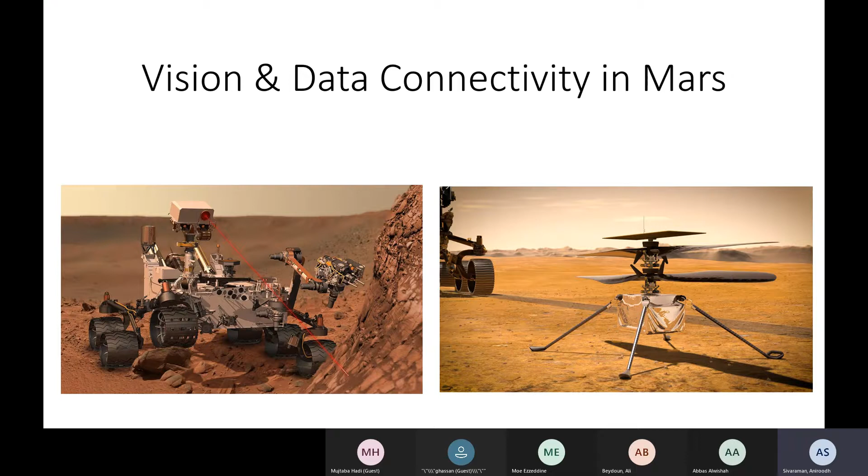So this is the data connectivity solutions for robotics and vision systems. I'll go over a few things, like the Perseverance mission on Mars. You can see the rover or the helicopter, everything has a vision system. And if you have a vision system, you need telemetry, somewhere you need to record the data and process it, so that's the brain and eyes of it. It's not just Perseverance, it's the extreme conditions and applications.

For example, we have firefighting drones. For agriculture, they'd be spraying fertilizers, very toxic chemicals like phosphorus that could affect your design and material selection, and in mining, constant dust pollution and everything. This is the thermal imaging system. This is where you need data connectivity, like 1 gigabit or 100 MB, depending on your application and environment, just to give you a feel of where we are heading.

A few more challenging environments would be underwater drones, firefighting robots at very high temperatures, and ROV, remotely operated vehicles. They're sent for oil and gas, to switch a valve on or off, installation purposes. We also do the data connectivity and mechanical hardware for that. If you go underwater, you need metallic casings to withstand very high hydrostatic pressure, so things start changing. The deeper in the water you go, the more bulky it gets. Whereas in the previous case, these are lightweight, but material selection and design are very important.

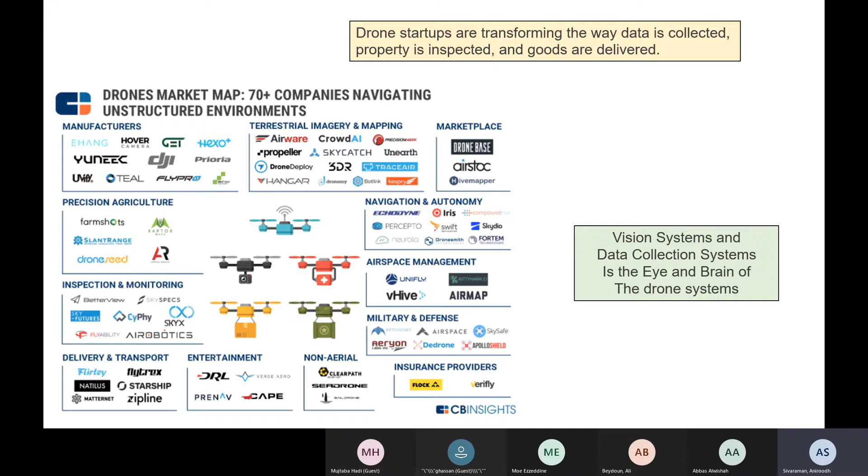So these are a bunch of startups I saw in Google Images for different fields - navigation, military, insurance, entertainment, delivery like FedEx. You can use drones and vision systems for everything, and for everything you need a vision system, which means you need data connectivity. So that's it, we'll start jumping into the mechanical design of this.

So what are we designing for? If any of you are starting to design, you need to ask who it's for, or which application and environment it's going to be in. So let's design for your environment and application.

Let's say we have ambient conditions. You start looking at factors like: what is the temperature range? What is the shock? Is there going to be vibration? What is the flammability? All these factors come into the picture.

So what's your application? That's the question. Someone says, hey, I'm going to put the camera on a vehicle. Is it on road or off road? If it's on road, it could be minus 40 to 125 degrees. That means it could be in Arizona, or it can also be in Michigan when it gets to minus 40 sometimes.

And what is the shock when you hit a road and a pit? If you go into a pit very often in Michigan, you're going to have shock. The camera still has to function, it should not disintegrate. And what is the vibration?

So we put accelerometers - if you want to know your random vibration, it's very simple. Just put an accelerometer in your car, at whichever location you want, say your dash cam or something, and record it. You'll get a graph and that's the random vibration. 10 or 20 GRMS is like a root mean square, the average G force it's going to have, let's say 10 G. So you've got to design for that, and if there's a resonant frequency, the camera would come off or the vision system would come off.

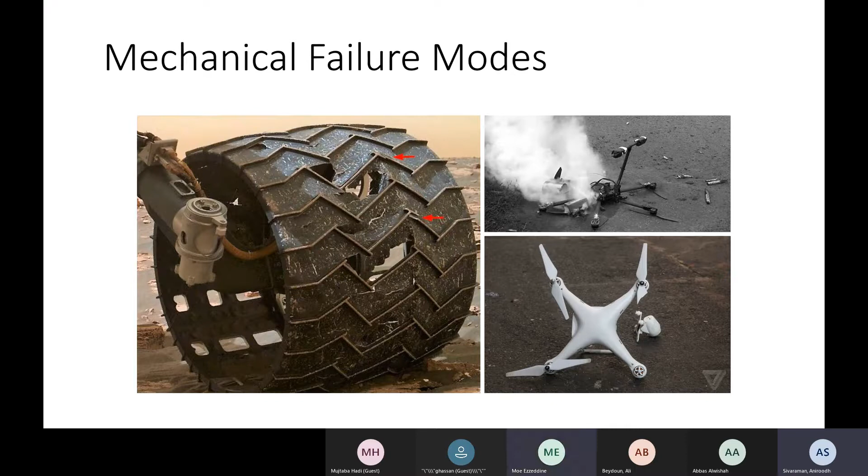So it's like a loop: what's the failure mode, and have we really addressed it in the pre-design? That's how a good design engineer goes forward.

So how do we approach this design challenge? Same thing again, coming back - I'll take an example and show. Usually we will run some FE analysis for flammability and everything, like temperature range, shock, and random vibration. We'll run some analysis and see the stress and strain. The software tool we use is Ansys.

For flammability, it's pretty simple - we have the UL94 spec. We can choose V0, V1, whatever based on your cost and application. Know your pollution level and your application, and you can design accordingly and choose the right material.

For fluid exposure, you saw the immersion testing, putting the part in a test tube with colorful liquids and seeing what's happening inside. And sealing capability again depends on your environment. We can also do Ansys seal testing, which we call hyperelastic FE, and we use LS-Dyna for that, but we can still do it in Ansys.

And RF performance - what's your application? Is it a LiDAR system, a camera system? What are the losses, lag, EMI shielding losses? You can use Ansys HFSS. So Ansys is like a one-stop shop where they have all the tools on the planet to do anything you want.

So let's see an example. This is like a typical bracket for a camera system. You can take this bracket anywhere and install it in any of your rover, or the drone, or anything you want. So this is like the back bracket system.

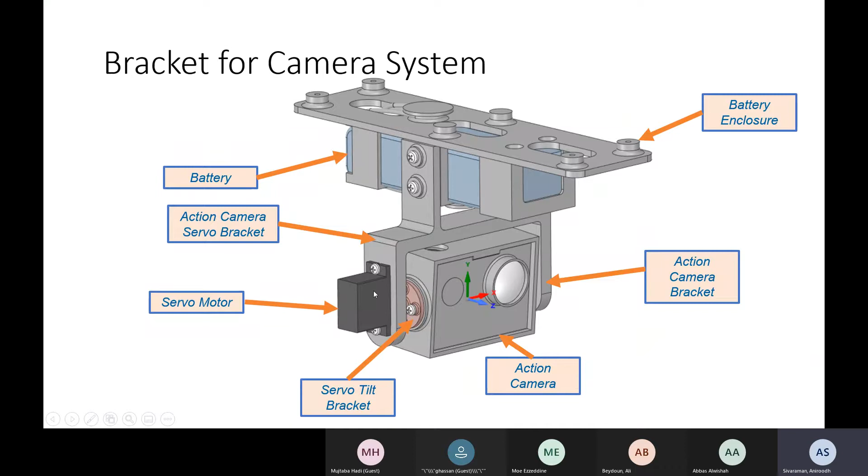So these are some of the very basic things to do — you start with an FEA. From here you can also run thermal loads and everything, like static thermal analysis. You can start seeing the red portions everywhere and design it in such a way that, since you already know the failure mode, you address it.

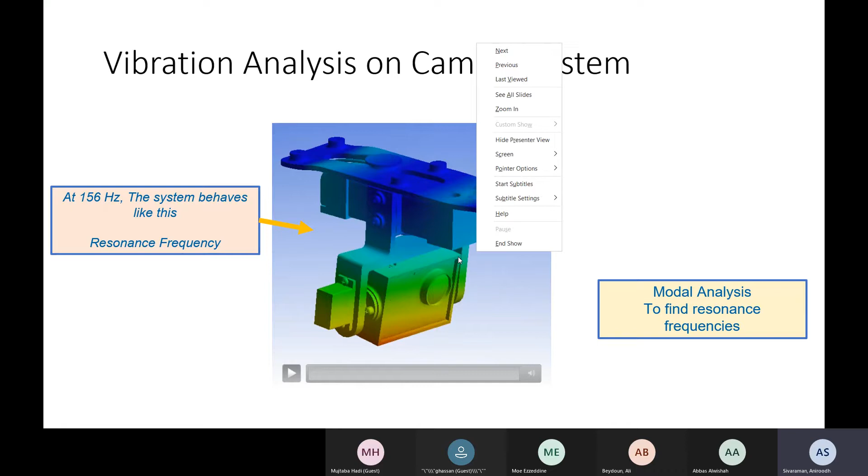And this is the vibration analysis. Did I run it? Okay, so let's say this is the resonance frequency at 156 Hertz. This is a simple modal analysis — all vibration analysis starts with modal. From there we go for random vibration, shock, and everything else.

People who know about resonant frequencies know that's the natural frequency of the system. At certain frequencies there'll be a bunch of natural frequencies, and the parts would start having a modal shape even though it's static. So this is the modal shape, and you can see this entire part is swinging around the bracket.

As this is swinging around the bracket, you can see the battery enclosures — you're going to see some stresses over here, and on top, all the shift points are going to change. So if your system is going to have 156 Hertz because of your rover motor or something constantly vibrating at that frequency, rest assured they're going to fail.

So you have to design the system in such a way that you move the resonance frequency of the overall system away from 156. Again, if you attach this to a few more parts, the natural frequency could even drop further. So you just keep this in mind and keep tracking how the natural frequency changes, so that at the end of the system, when you put your part, even at natural frequency, it can withstand the load.

Mechanically and electrically — with this swinging action at 156 Hertz, there could even be electrical failures inside. So these are the things — very simple stuff with material selection and some Ansys analysis you can do on this.

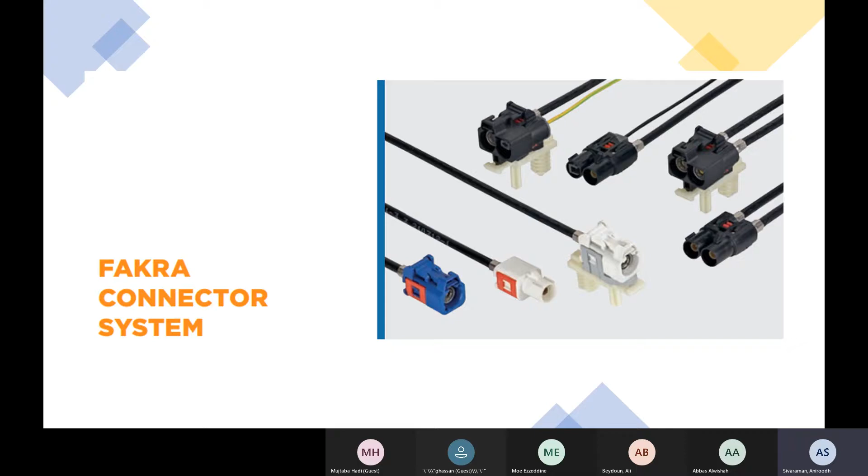Whereas this one is pretty sealed, you can use it even in mining operations and everything. And here are a few more high-speed data connector systems.

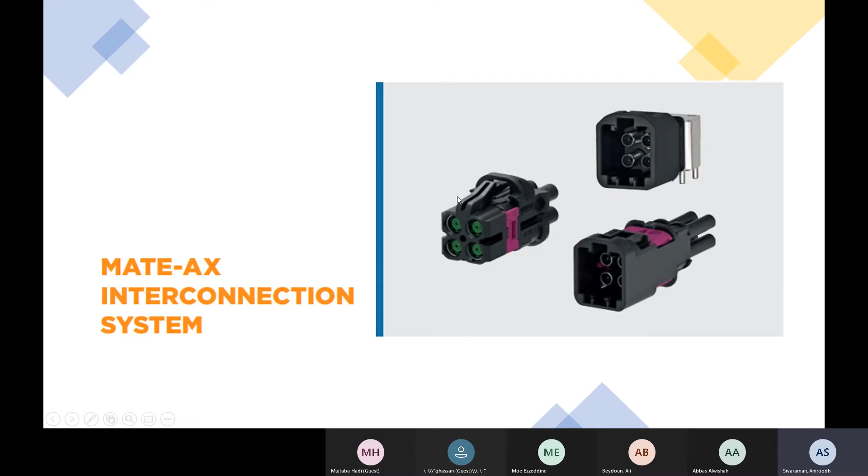Same applies for the MATE-AX - this is for like 10 Gbps connectors, very high, 6 gigahertz connectors and everything. For LiDAR, if you see like 4 of them, that means there are 4 camera systems or LiDAR systems here. We have the plug, headers, and everything. So all this would go into your camera to feed back to your telemetric system.

These are another MATE-AX connectors that could be used for extreme harsh conditions. The material selection and the seals here are for IP6K9K after heat exposure, so they can withstand pretty heavy temperatures. That's why they get bulky.

So yeah, that's it. Go flying. Any questions, guys? Nice presentation, thank you. Thank you.

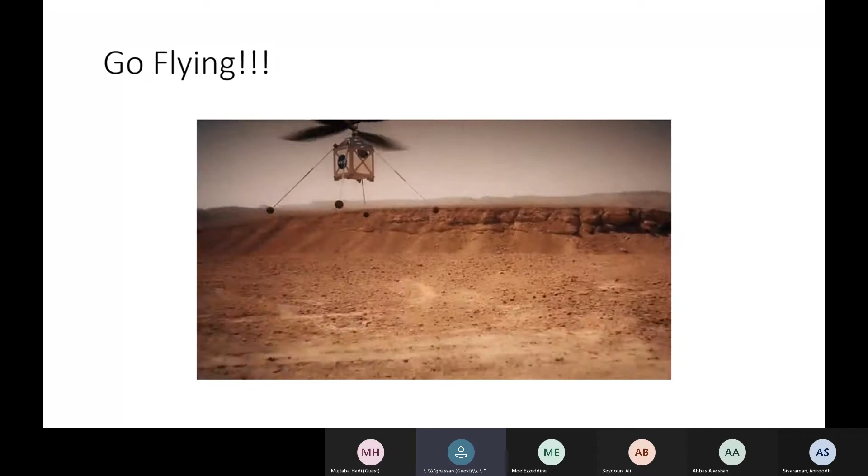What you showed in the beginning, the experimental setup - let's go back to this one. So design for your environment, that's what we call the working condition. You definitely have some tables that already have the data. So when you design, do you usually do the experimentation and testing after you finish the product? Is that correct? Yeah, so this is what happens.

We get requirements from application engineers or product managers who say, hey, we need connectors for automotives, or we need connectors for drone systems or parking camera systems. So they give a set of conditions like sealing, fluid exposure, and then you make the part, design the part, and do testing. We have a bigger table than this - this one I made up, but we have a spec, a lot of specs.

We have USCAR, DI, and each company has thousands of specs - like 30 to 40 tests. If we don't consider these things proactively, each one would start failing, and each test would take like 3 months - it would be endless, like 10 years to release a product. So beforehand, instead of designing and failing at the actual testing, we do some prototypes or simulations, using a lot of equations and tables from the material suppliers and everything, so we can quickly do a design.

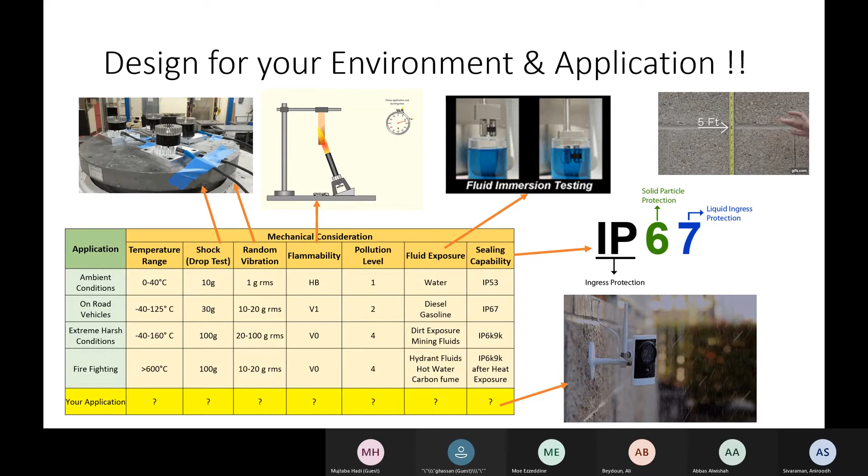Yeah. Thank you. Anybody want something? Can we go? Yeah, I'm sorry.

So could we go through the answers in terms of the vibration? When you do have this kind of brackets, you have this battery here, you have the brackets, you have other stuff, so how do you combine all that and get through the analysis? Yeah, I can show you.

Let me reshare my screen. Yeah, can you guys see my screen? Yes.

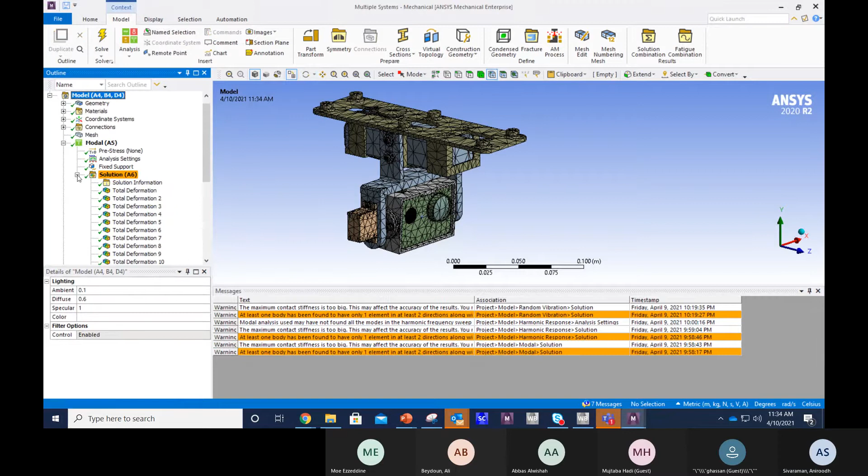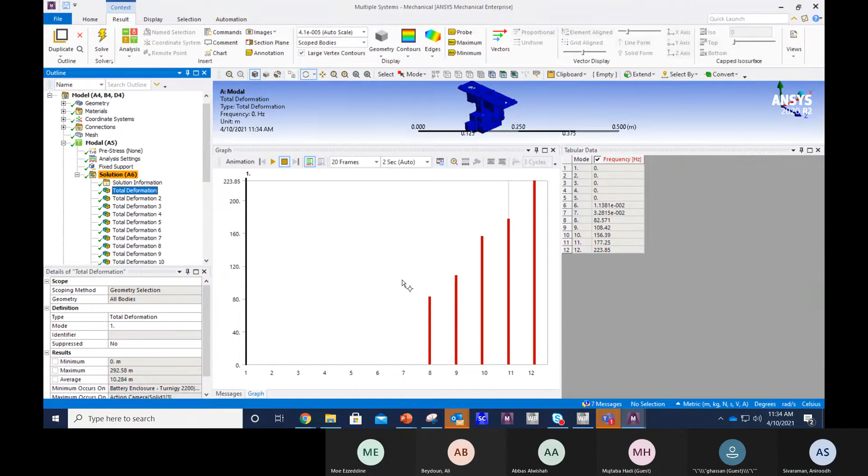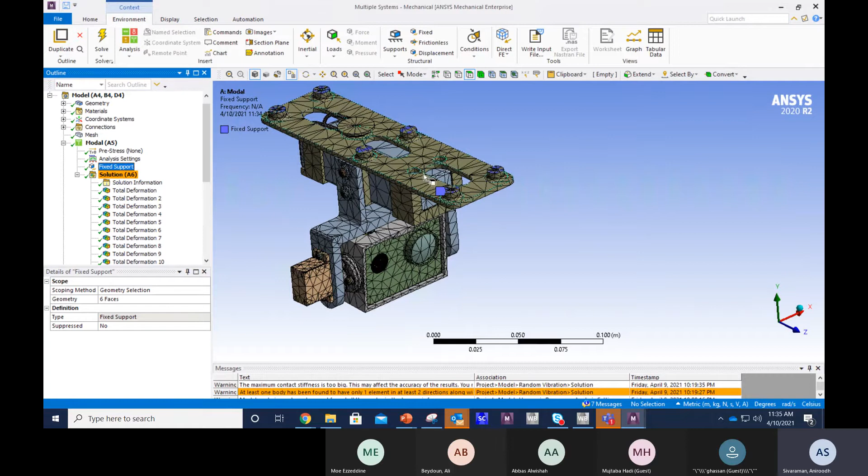Yeah, so you can just go ahead and assign the materials and everything. So here you can see this is the system. I'll show you how this system was defined before we go forward. This is the same camera system you saw. So the fixed support is the blue ones. Right here, I just given a fixed support, like you just put an M4 screw from the bottom and screw it up to your skeletal structure chassis of your robot. So this is going to be hanging from this bracket all the way here. So now if your rover is moving, or I just want to see the natural behavior.

So this system has a mass, and I have assigned the appropriate materials and everything. It has a mass, it has moment of inertia, it has its own stiffness matrix, everything it has. So now it's going to have a natural frequency, which is going to be root k by m, stiffness by mass. So the ratio is going to be stiffness by density. So we want to find what the group of natural frequencies this system naturally has, which we cannot change. We have to change only by changing the stiffness or changing materials. They do change, but overall the natural frequency we can get a mapping. So let's see this.

So let's see what are the numbers right here. From mode shape 1 to 7, it's pretty much nothing, all zero frequency. There's really nothing to do. Let's see what mode 1 looks like.

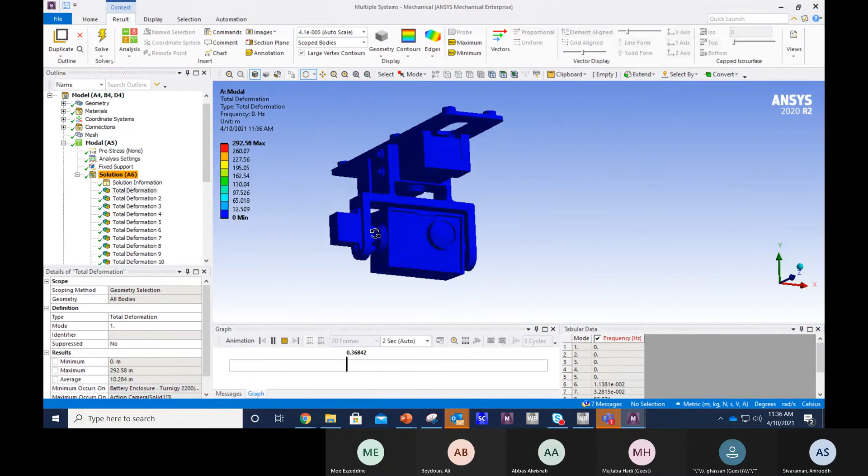Something is shaking, an internal part is shaking. There must be an internal part hanging around, that's why it's doing that, but it's nothing serious. So, but we have something.

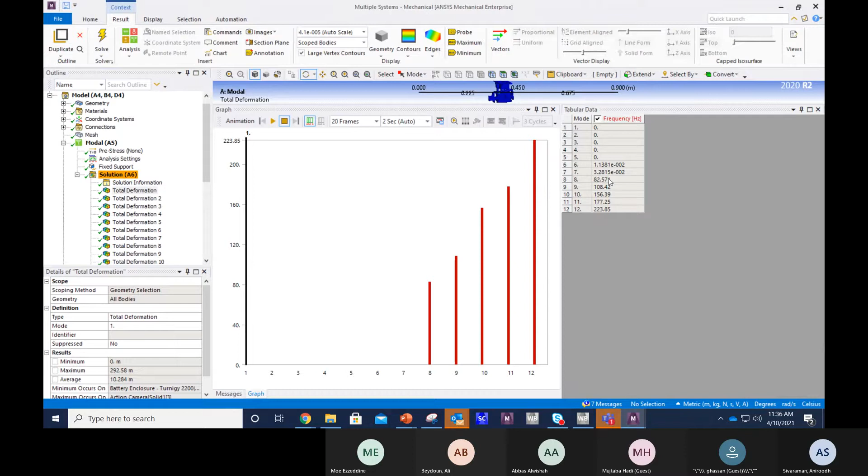So from mode 8 to 12, we have something serious. Let's see what happens at 8. Each one we'll just go through. So that's why your design is very critical.

Let's see what is 8, but you can see this is a spring element, a spring element to hold the battery tight to this. But what happened because of the structure? Did you see here at 82 Hertz?

This is going to happily start swinging. So is this a good design? Can we come up with a better design? Do you want to have the steel spring holding it tight? Yeah, not a great design.

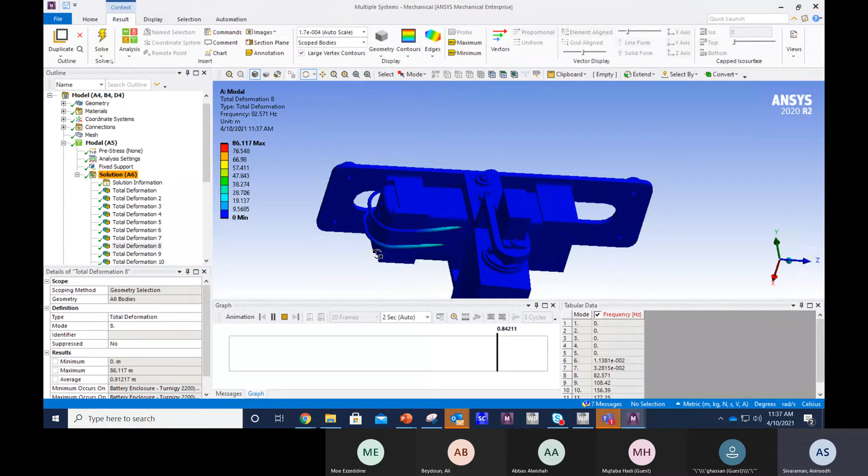That's how we start saying, oh okay, 82 Hertz. Our motor is gonna be, if it's gonna be at 100 Hertz, this problem is not gonna be there. But if it starts like 80 to 82 Hertz, this is gonna happen, and most probably the spring could come off or break down if it's constantly at 82 Hertz. So you need to know what is the natural frequency of a system.

So let's go to the other one, mode 9. Again this time it's going to be sideways. So again, two frequencies, 82 and 108, we have this. So hopefully your system is not in that range.

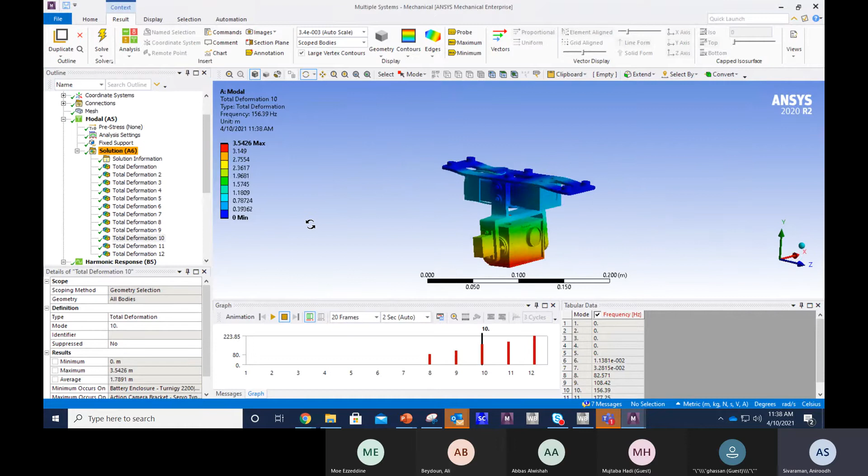So mode 10 would be interesting. Mode 10 is 156 Hertz. So let's say you designed a system where the actual vibration of the system is nowhere near like 108, so you just pushed it all the way to 120 Hertz, no, push it even above 150. Now you have a different problem.

This entire system would be vibrating. You can see how the brackets are changing. So this is how you see, when it says red, there's a maximum deformation, and maximum deformation happens at the bottom and also in the bracket. So you just see all the components that are moving. It's pretty much everything is like the apple is shaking the tree. That's how it is. Definitely you don't want it to be at 156.

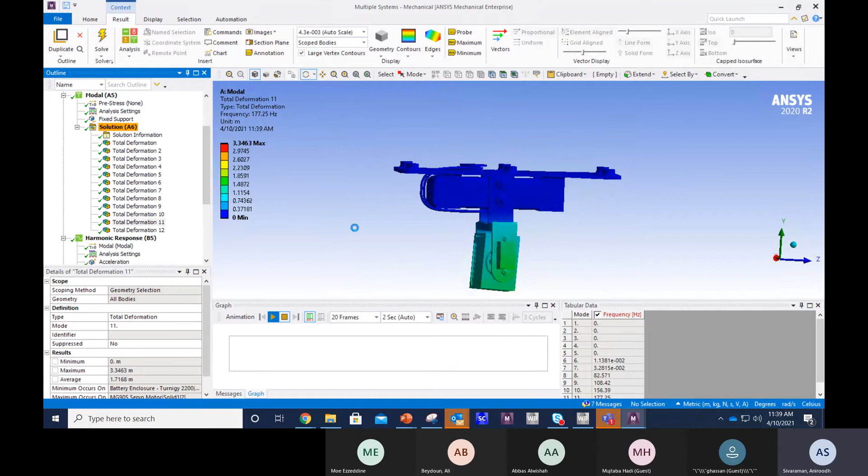And you can see what is mode 11. 11 is 177, you can also see 177.25. Let's see how it behaves. It's going sideways now. So what's interesting is that at 177, the bracket, the top portion has nothing to do, it's pretty happily sitting. But your action camera, GoPro, is going to move left and right.

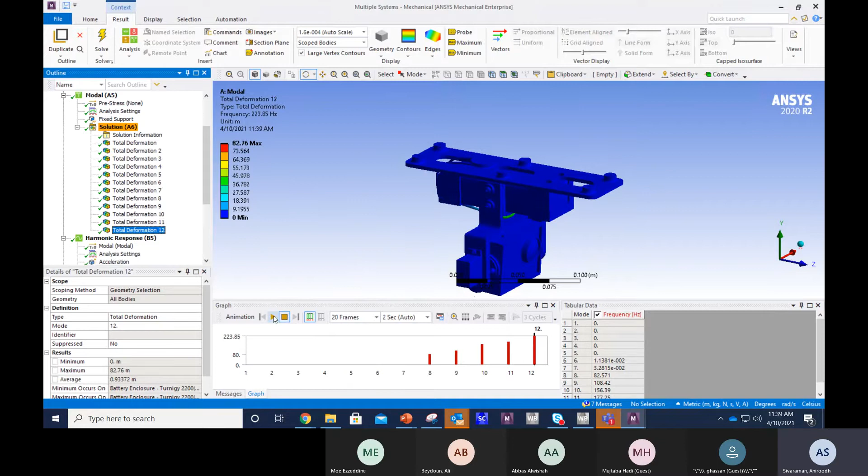So now we have to be aware, if you're going to be at 180 Hertz, this is going to happen. That's how we would be saying it. And let's say at the last frequency, 223, again this is the same culprit again, this beam. Now each one is moving.

So overall, you just see, hey, this is what my frequency is going to look like and where it is. Each subsystem will have its own, based on the shape and the mass, its own natural frequency. You start mapping it out, writing each one, what is the natural frequency. When you put everything together, they all behave completely different. In that way, you can predict.

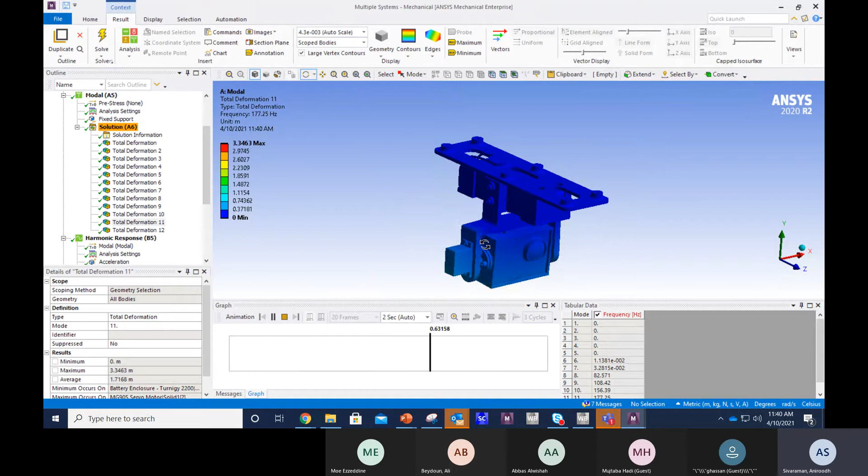So if this part goes now to vibration testing, the shaker table I showed in the previous one, it would fail. If it's at 177, yeah, this is gonna fail. It would just mechanically break right here. If I just put it at 177 Hertz for 10 minutes, this would just come off, because at resonance frequency it starts absorbing all the input energy. It will just come off. So that's how it is.

Any questions here? Anything you want to see? Yeah, that's, thank you. So I'm waiting for others to ask questions. If not, I'll ask another question. Okay, anyone else questions?

Okay, then you can go ahead and ask.

Yeah, that's true. So now we're gonna talk about fatigue analysis. Which stage do you have to consider the fatigue analysis here in Ansys? We have a bunch of models for fatigue. The question is, do you run fatigue analysis separately, just for fatigue? Yeah, fatigue analysis is separate. And you give it a certain number of cycles when you look at the failure, or you can count the life prediction. You can predict life when you use Ansys. Okay, so yeah.

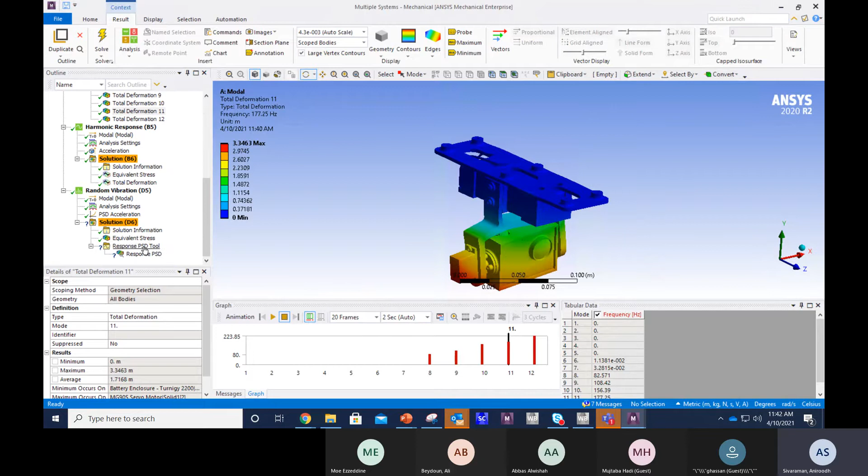Overall, random vibration - this is the random vibration you can see here. I just ran some random vibration. This is the power spectrum density. You just give it like a probability, it's random. Anything that's random, like a stochastic process, would give a probability curve, like what the power gonna be, a power spectrum density.

I just gave like say 1 to 300. Let me give like 400, and the higher the number, the acceleration per hertz, that means at that frequency the probability is higher to have 10G. So let's say I give like 100 or something. This is the kind of profile.

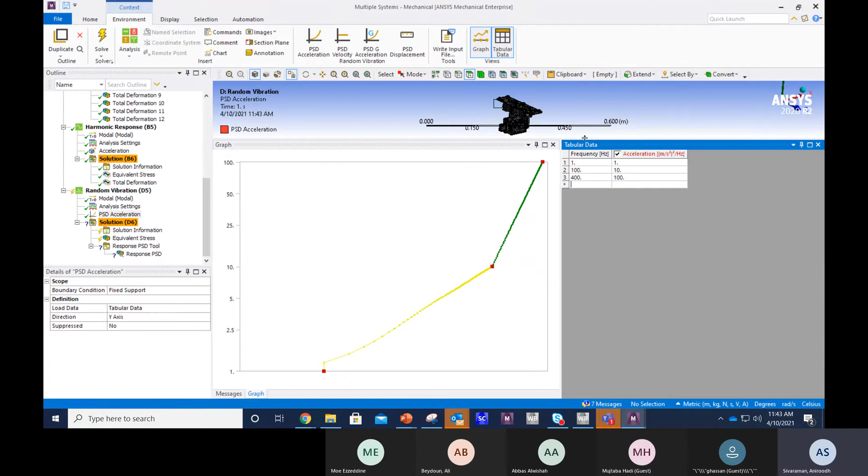This is what they record - the big OEMs like Ford, Chrysler would record. They have a testing engineering team. They put accelerometers on the system, like on an engine or something, over here they keep putting 6 accelerometers and test the data, and give it as a power spectrum density curve like this. They say, hey, you guys take your subsystem, test it for this. If there's any failure, mechanical or electrical, let me know.

So in a way, it is fatigue. Indirectly, it comes down to fatigue when it's vibration. This is one way of tackling it. There are several ways, but this is a common way I use.

What I would say is, I just gave an input. In the power spectrum density, it says which direction - this is the tabular data. I'm just saying Y direction. Let me give it an X direction - you have to do X, Y, Z. Let me give it an X direction, the sideways. I don't know what is going to happen. So let's run it. Solve.

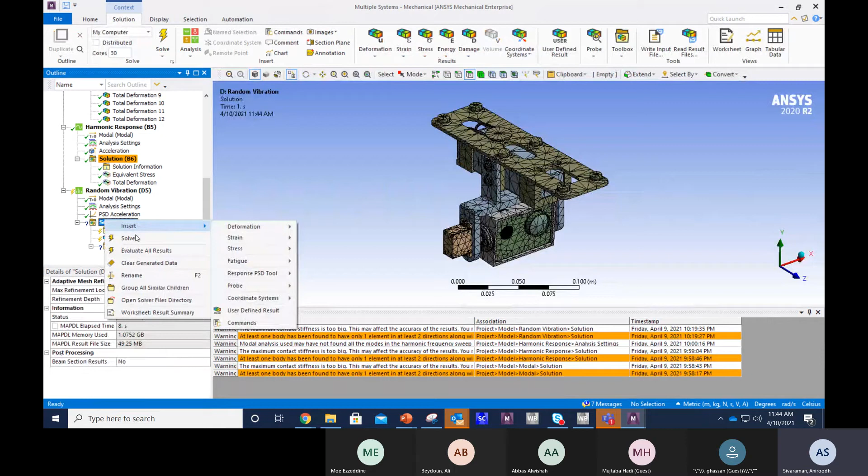There's some error. Let me close this. Let me delete. It's taking longer than usual today.

The idea is like, once you give it the random vibration, it gives you what is the stress you would see in the part. If that stress is below your ultimate tensile strength, the material breakage point, you're good. But if it's very close to it, you want to redesign it. That's how we do the stuff.

That's one way of approaching it. They also have several fatigue models embedded, but I haven't explored them yet, but I can show this one.

In the modal, once you go from solution, you can right click, transfer data to new random vibration. If you want to activate any random vibration, anything, ultimately it comes from modal analysis. Even if you directly go more without modal analysis, nothing could be done because these natural frequencies are fed back to here, so they just do a mathematical computation to give the values.

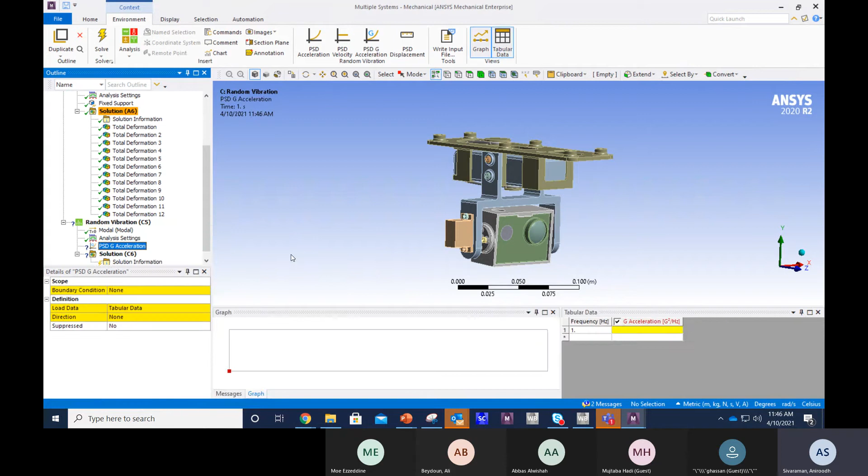Now it says, what do you want to do - PSD acceleration, velocity? We usually go for PSD G acceleration in terms of G. So let's say what's the load data, let's give it the load data. So at 1 Hertz we would say 1G, and next at 100 Hertz we would say 10G, and at 300 Hertz it's like 45G.

So let's say someone gave this data, they're just riding on Mars or something, or in Arizona, and they predicted, hey, this is the kind of G you're gonna have. We want your subsystems, all the subsystems going into our skeleton, to withstand all this vibration load.

So this is the power spectrum density graph, G square by Hertz. Now we have to say which direction - X, Y, Z. Most times when you do it, we have to do triaxial vibration, that is Y, X, Z, all 3 directions. We have to be testing it.

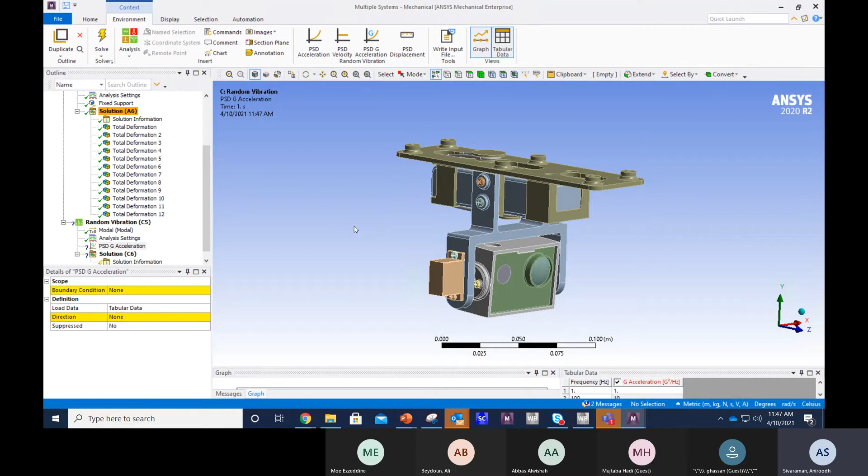Most probably the worst case would be the sideways. They behave completely in a different way in each axis. So let's try the X axis and see.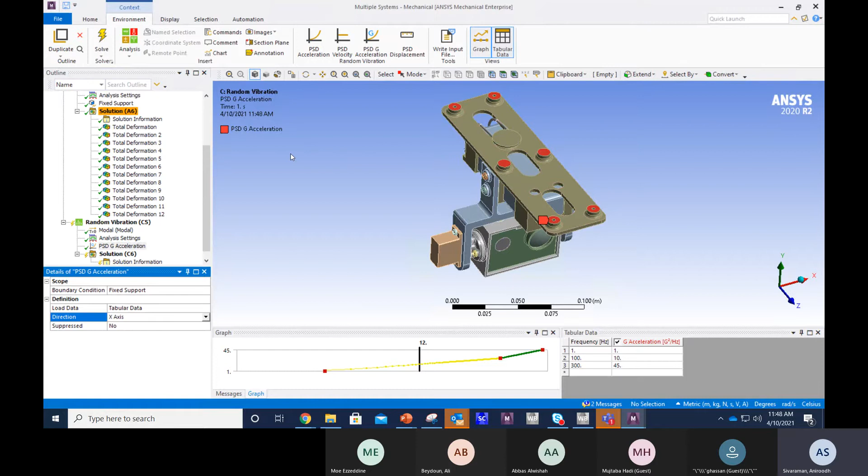Boundary condition, fixed support - it asks, where do you want me to apply? This is where I fixed it, and this is where we're going to be applying the vibration load we specified. And what direction do you want to apply? In the X direction. So we hold this part in red, whether it's fixed, and move it in the X axis. Let's see what stress that gives off.

So it's stress equivalent, von Mises. We also have a fatigue tool here - I haven't used it before, but you get the predicted life and everything. Life damage. It's using the Steinberg method, and stress over here is like equivalent von Mises stress. Somebody would use principal stress, someone would use von Mises shear stress, so it depends.

I'll just delete them, come back and see. So let's just see the equivalent stress. Here in the equivalent stress, you can see it's 1 sigma - that means, like, 68% of the time, what is the stress you're going to be seeing. Now let's say 2 sigma, 95% of the time, what stress you're going to see. 3 sigma, 99% of the time.

Since this is random, we have to go in terms of probability. Every time you see random, that means stochastic probability comes in. So we'll start with 3 sigma, or we'll just see what each one says. Let's go and put 1 sigma and see what stress we're going to see.

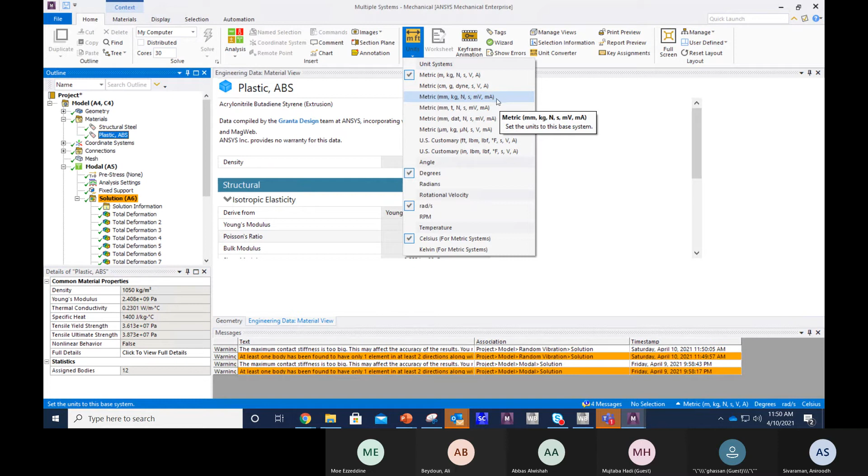We will change the units to megapascal. Now it's easier. So let's see, what's the plastic ABS? The tensile yield strength is like 36 megapascal. So now we know it should be within 36, or all the plastic is gonna break.

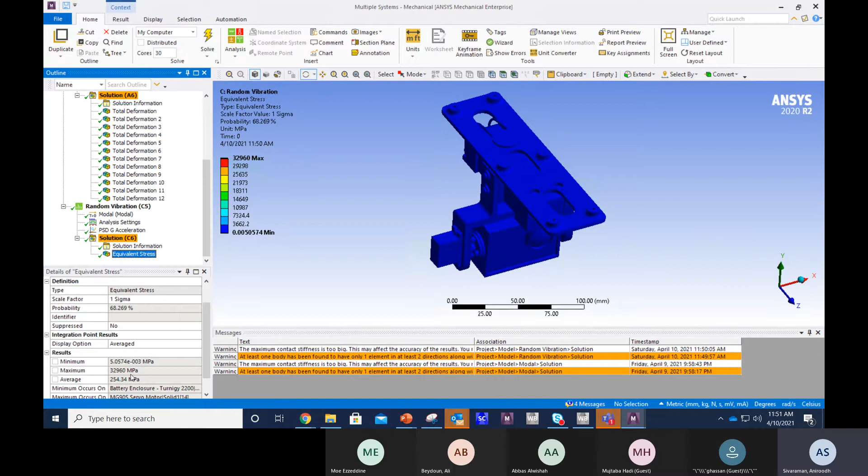Guess what, how much do we have? We have, oh shit, we have 32,000 megapascal. And where is it happening? That's gonna break. Yeah, this is not good for such a very high G.

Let's see what the stress in von Mises stress is gonna look like at 2 sigma, 3 sigma, 99% of the time. Yeah, so 763 megapascal. So what it actually says is the probability at resonance frequency - what is the probability, at 153 hertz, of seeing 10G or 100G? It's much less, that's why that's the kind of thing.

So 1 sigma is very high, you don't want to go with 1 sigma because you get crazy numbers. But look at something like this - even this is higher, 763 megapascal at 2-sigma, 254. Okay, so 99% of the time you're going to see 763 megapascal. That means my PSD acceleration is too high. Let me bring it down to 10 and see how this looks.

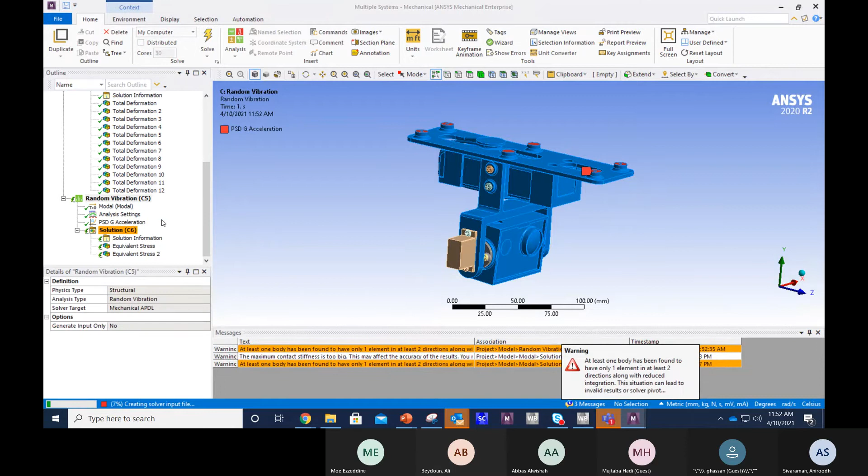Anirodh, this looks great, but okay, can you also do thermal?

Yeah, we can do thermal - in terms of the structure, or because I think in Icepak, also within Ansys, you can do thermal on the PCB as you power it up. Let's say you have a high-end computing process, it would look at the thermal and generate the heat. As previously noted to the team, you want to look at the heat and where it's generating to pick the material that either absorbs the heat or dissipates it. So this is called steady state thermal and transient thermal. You can do both and see what the temperature profile looks like. It's pretty quick - thermal is quite straightforward, so it won't take a lot of computational time.

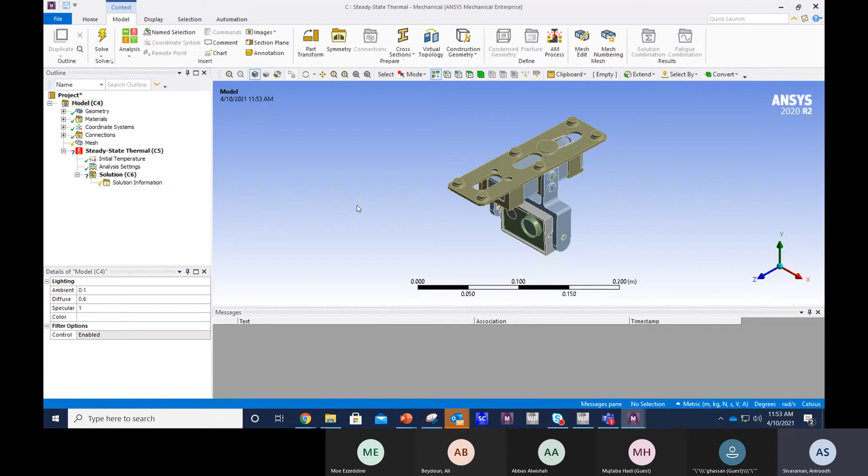So yeah, I just fed the material. One good thing is once you set up all the material, you can just feed it through different suites you want. Let's say we just generate a mesh quickly.

Yeah, so mesh is created. So now let's say we have high temperature. Let's say at this point, for whatever reason, there's super high temperature. We'll put it near the engine or something, with a magnitude of 125 C. So we have 125 C over here. And you don't want the cameras to have high heat.

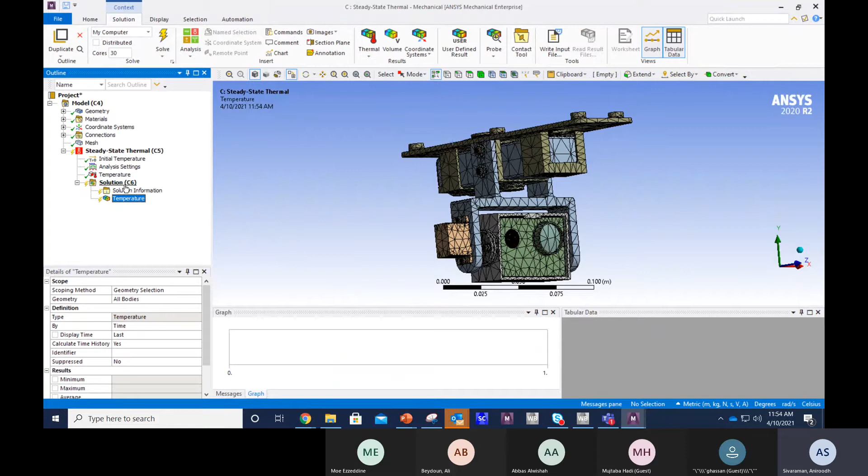Let's see how the heat is propagating. So let's see the thermal gradient, that's temperature gradient, how its profile is going on, and total heat flux. Let's just solve it and see how it's going to look like. So you would be seeing from here how the heat flows all the way down here, and you can see what temperature your camera systems would be. You can also find out what time it takes.

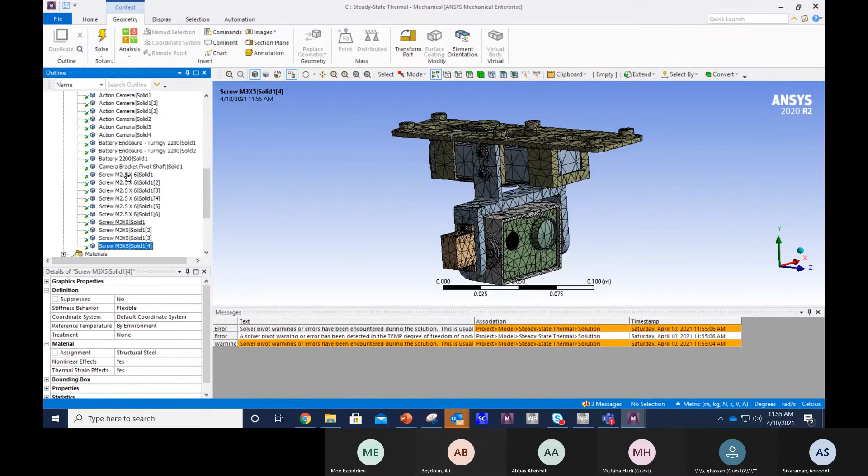Okay, there are a lot of materials, so let's think. Yeah, these materials, but for some reason it's not running. I've run a bunch of them, but yeah, this is where we do it.

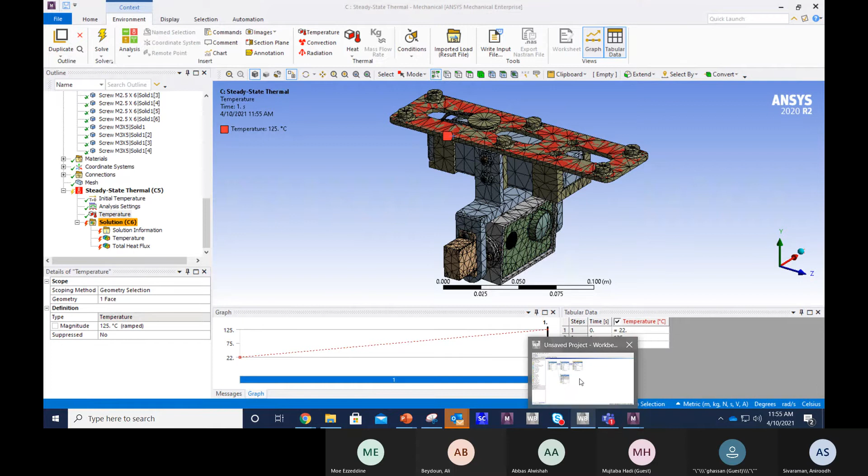Like you give the temperature right here and it flows all the way down, and you can see it's 125 C. By the time it comes, it'll be like 90 C. There'll be temperature loss. And we can also find out the transient, like how much time it takes to go, by using transient thermal.

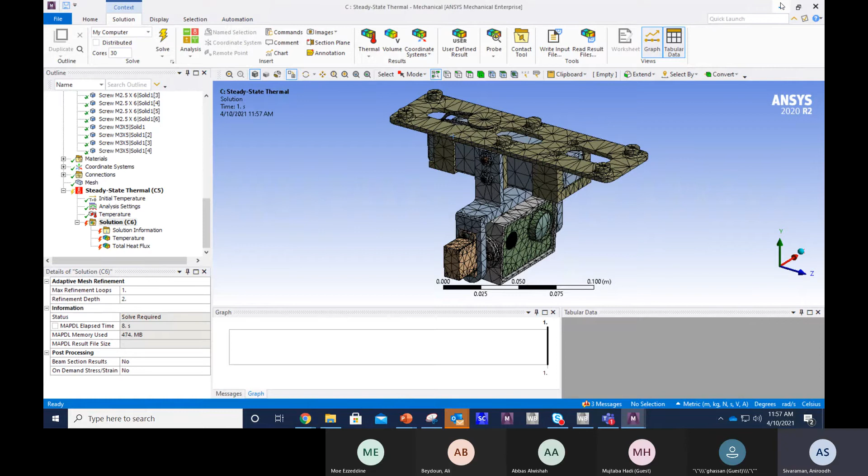So, okay, let me do it this way. It's not coming. Yeah, something about the model, I have to go back and clean it up and do something. It will take time. But yeah, so in transient thermal, we can do the same stuff.

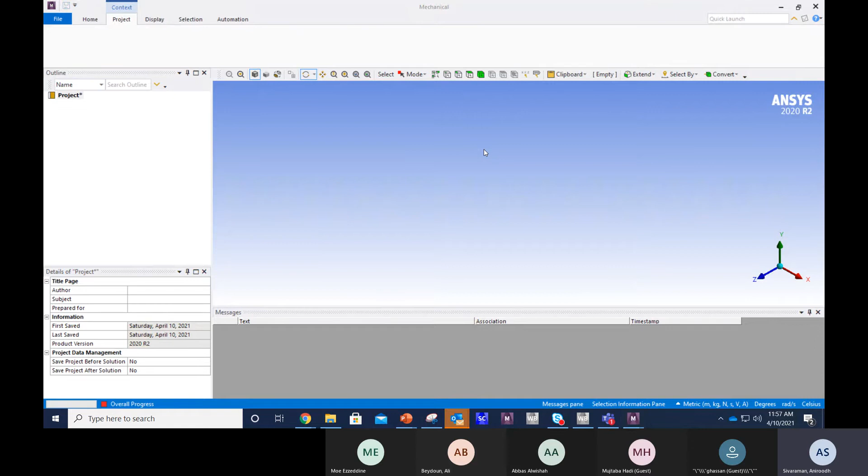Let's see. So transient means with time, the steady state shows the final, but you can clearly see it takes so much time. Let's say it takes 10 minutes for the heat to transfer from the bracket to the camera. How much time does it take? So this kind of transient, we use quite often in many of my applications.

So let's generate mesh. Insert. So you can have convection, radiation, heat flow, everything. Let's say we have a heat flow this time. Let's say we are just giving a heat flow of 100 watts here. And then you can also use some convection. Insert convection, the camera surface.

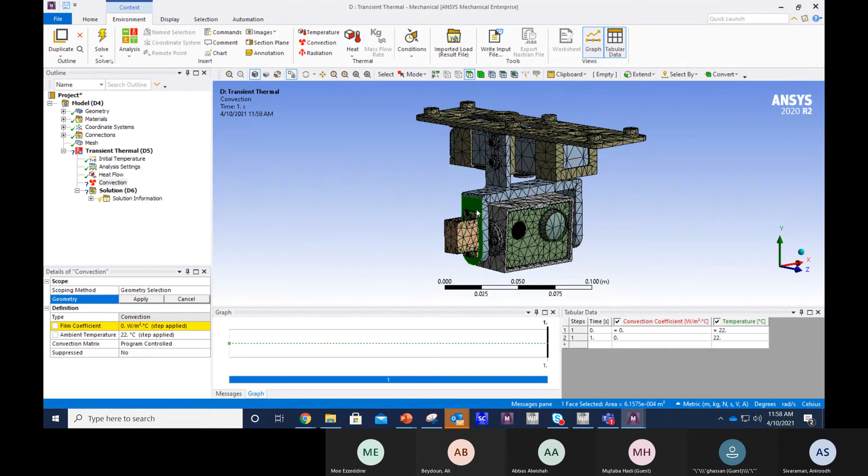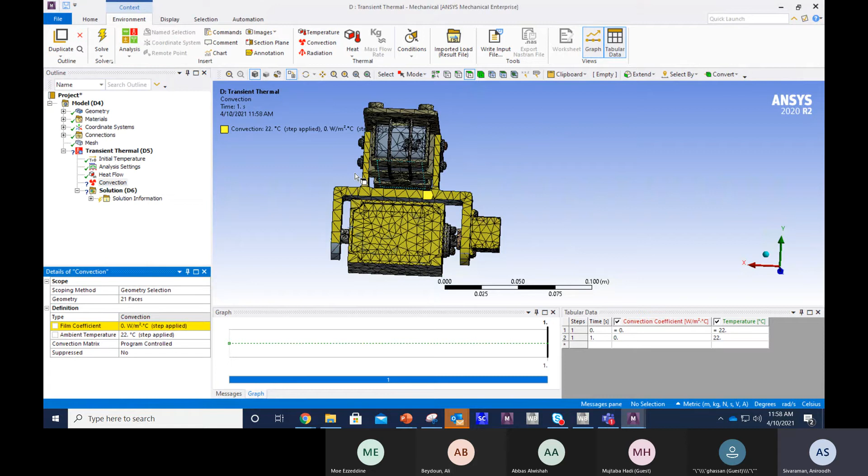So let's say all these surfaces are going to face the convection, that is like any airflow around it. I'm just playing around. So let's just apply. So these are the surfaces where the air is going to flow and heat loss could be accelerated by convection.

So here, an interesting thing I like to show is, so here, info time dependent. Okay, there is a way to bring it from Ansys. You can bring a certain film coefficient because the heat transfer convection coefficient, we generally just put a constant number here, like constant 10, 5 to 15. But there's a beautiful graph with different temperatures you can put in. I forgot how I did it. So Ansys has it, so in that way it'd be more accurate, and it's very critical for us.

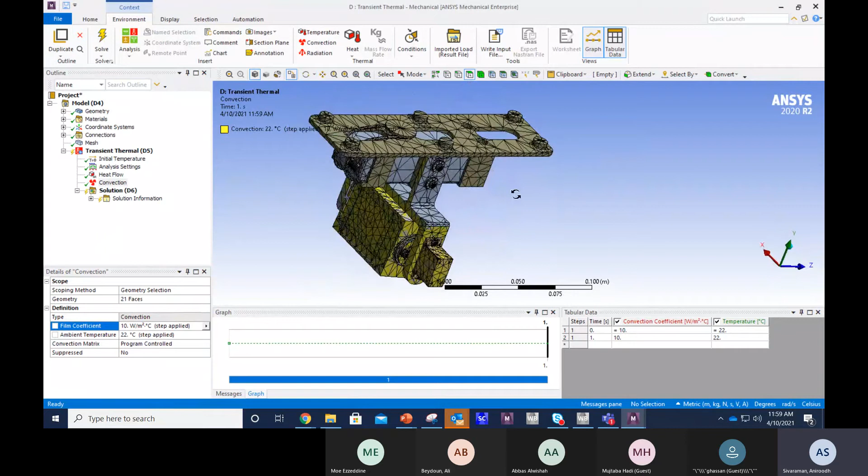For right now, we can just put 10 and most probably it'll have the same error. But what to look for? Thermal gradient, anytime temperature you want to see the thermal distribution. Total heat flux, how the heat is moving around. What else do we have? Probe, radiation. I think that's enough. Directional heat flux. Yeah, this should be good.

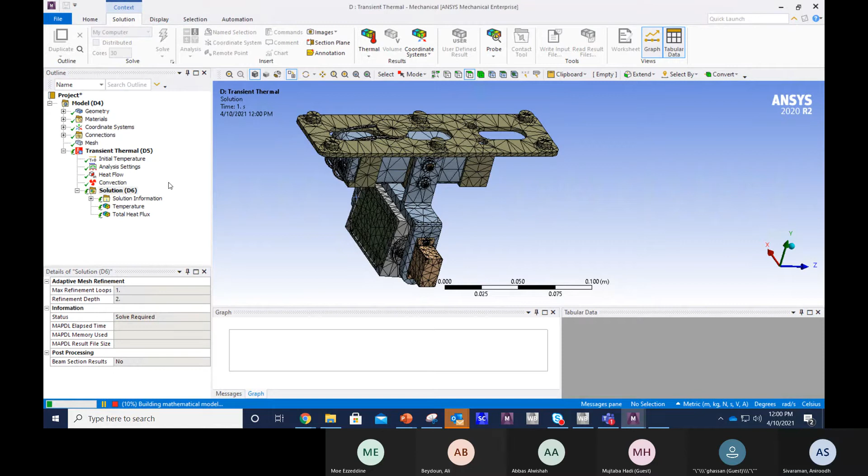Let's solve this. There could be the same and some pivot warnings would be coming. Yeah, it could happen many times. We have so many matrices and each surface is interacting in so many ways. There could be some error happening. We have to go and find each surface and solve it. If it's just two bodies, it will be pretty easy. Let's see.

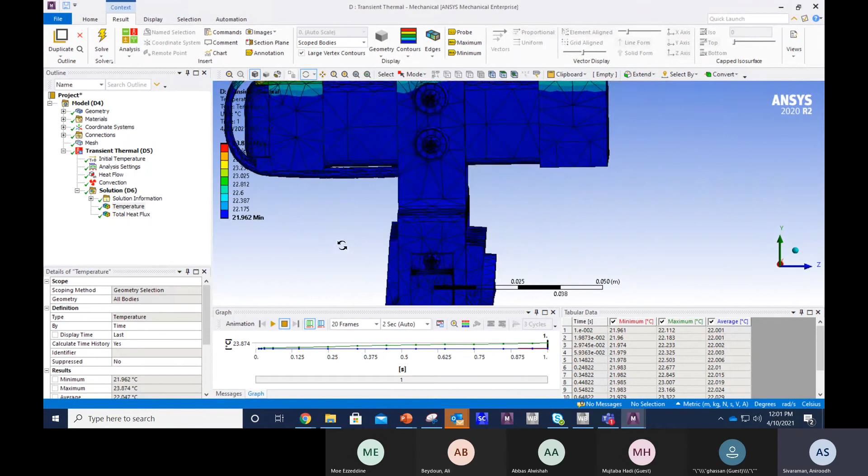Oh, it came. That's surprising. So you can see the temperature. Right now we're just giving 100 watts and none of it is really passing down. That's interesting, I thought it would come all the way. The ambient is 22. Everything is at ambient, so if you give 100 watts of heat, all the heat stays right here. It's not even going down.

So let's say that's because of convection. Now let's freeze the convection, suppress it, and run it. This would be interesting to see - whether without convection the heat flows much faster.

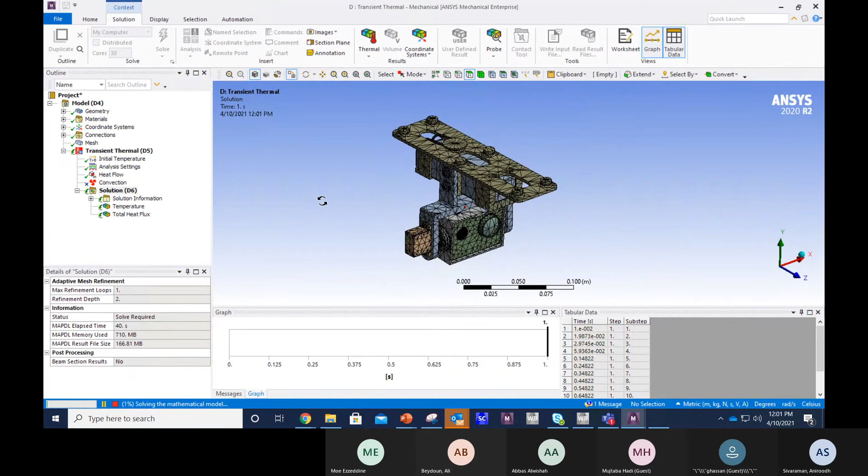I don't think convection matters, because below the battery it never even went. So the heat is not high enough to penetrate it. The enclosure itself sucks it up.

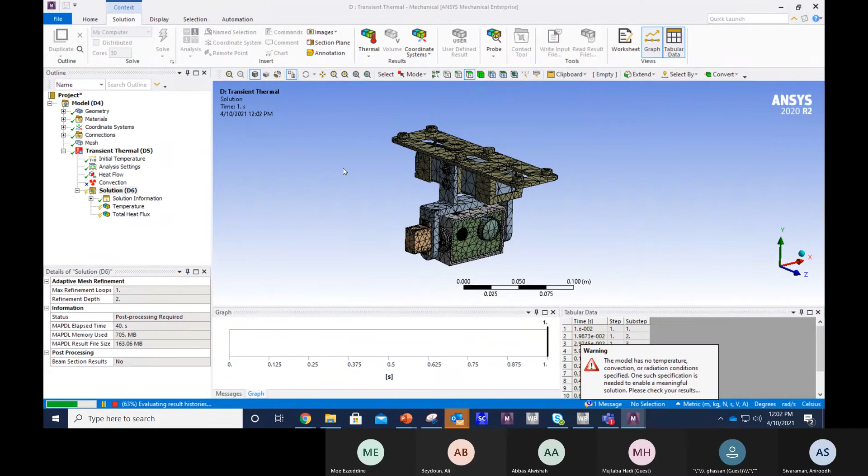Ah, model has no convection variation. Okay, so yeah, it doesn't matter. No matter how much, 100 watts is not high enough.

Let's say we give a temperature here instead - apply a temperature of, let's say, 150 degrees Celsius. Very high temperature, and let's just run it. Does it make it any better, or is this bracket itself thick enough that it sucks up all the heat? Let's see.

I want to show beautifully how the heat flows from top to bottom. Looks like the bracket is strong enough.

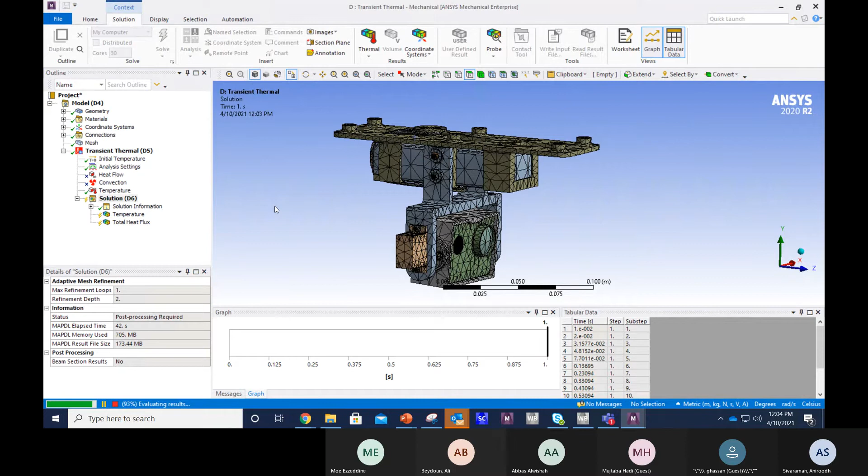Yeah, no matter what you do, the heat is not flowing below it. Let's see - this is how the heat is building up and then it saturates. Let's see what the average, minimum...

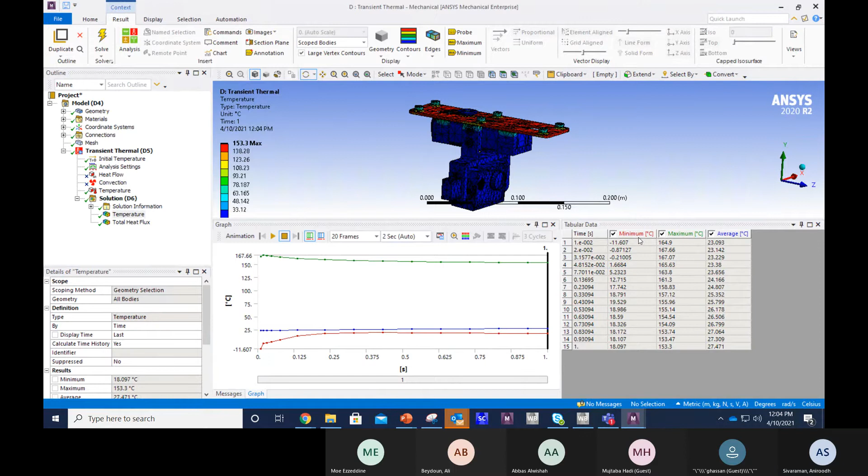Not much difference. Let's say we apply the temperature right at the center, right here, and remove it from the top. Let's see how the heat is flowing. So somebody applies 150°C temperature here - is the heat going to flow up? I still see the heat gets localized here, it's not going to flow up or down.

So one good way to see this is - if you have very high heat exposure or something happens, your camera is good, all the battery and everything is good. That's the job of a battery enclosure, right? Very high heat, burst, shock, drop - your battery should not be damaged. So it's doing a pretty good job of this. Let's see what happens in this holding bracket.

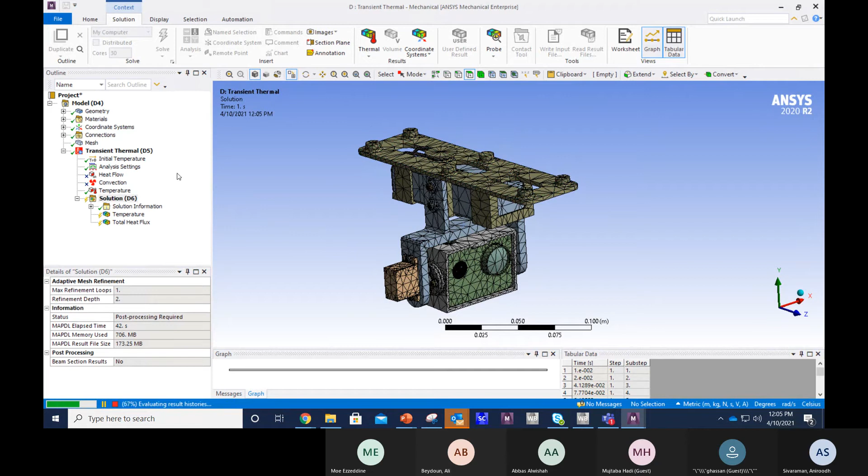You can see there is some heat flow, but nothing sideways - the heat just flows all the way down here. So at 150, the least you see is 78 at the bottom. This is a typical heat flow - this is how you can define your system more accurately.

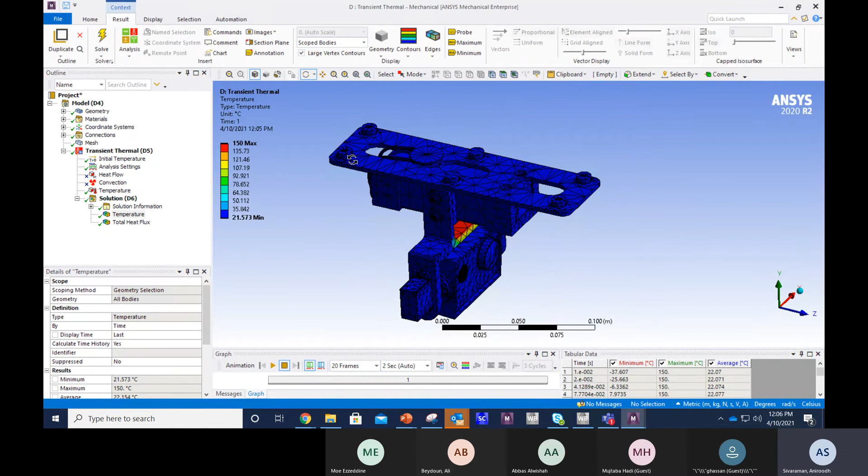You can endlessly play around with permutations and combinations, but the system has settings that are very user-defined, so you can choose which way you want to apply the temperature and see how the heat flows through it.

Any questions or anything you want to see here?

Let's see what the heat flux and temperature flows look like. You can see how the temperature flows, and it's very highly localized - it's just following through the thickness, not going anywhere else.

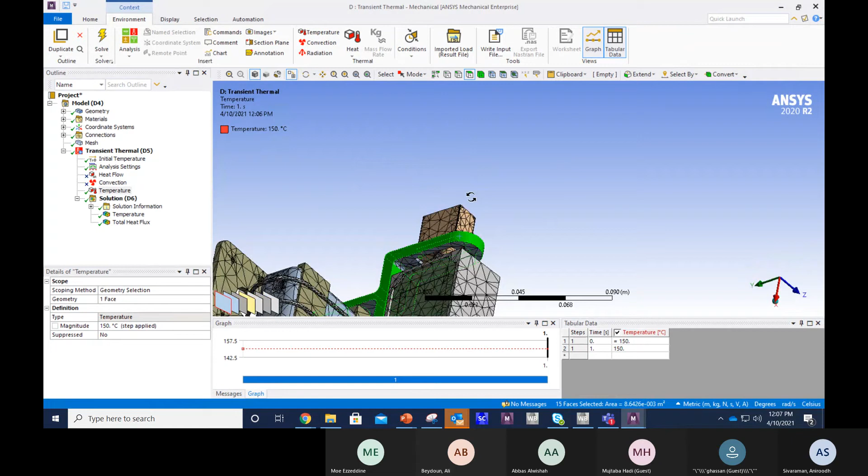Let's see what happens now - the bracket is heated up. Somebody has put a welding gun over here and it gets heated up. Does it really spread the heat throughout? Any kind of damage happens across the system, you want that part to fail, not to spoil or infect each one of the others. So far, each bracket is just handling it itself, not transferring the heat or stress outside. Let's see how the entire part behaves under heat.

At any time you don't want your battery to get heated up, like a Samsung Galaxy heats up. So far it's good - heat is not being spread.

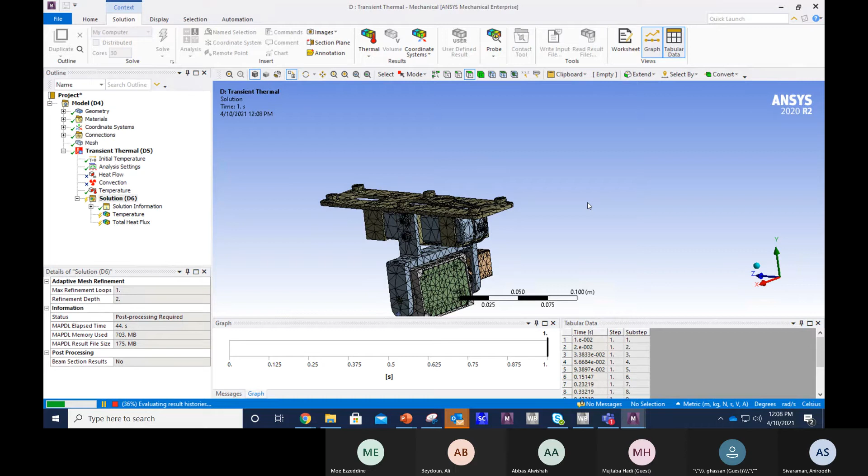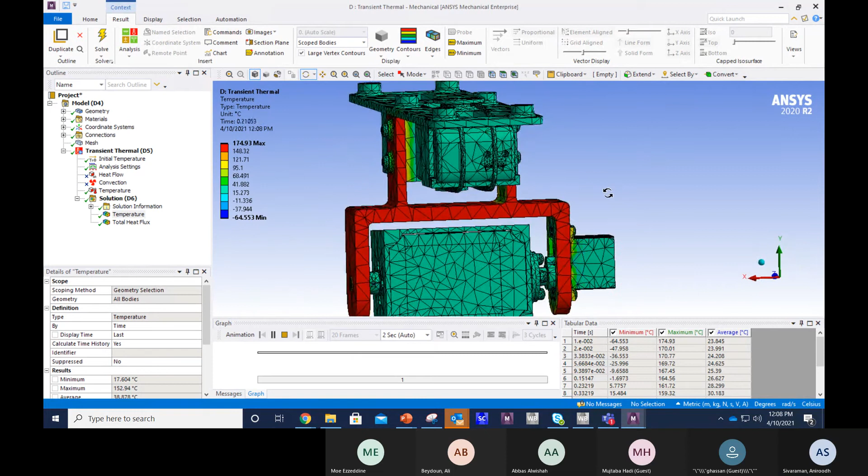Now the heat is spreading a little bit. It's so slow, it's taking time to see. The animation isn't showing fully, but you can still see most of the bracket - if the entire part is heated up, it all turns red.

Now the heat is being transferred slowly to the servo motor. The motor gets heated up, not great. The battery enclosure gets heated up too, but still not the battery - the battery is still protected. Yeah, the battery is getting heated up right here.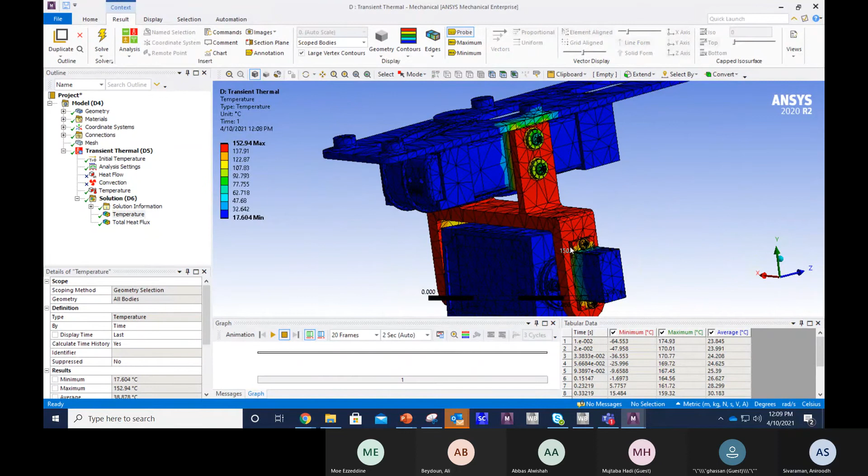You can take a probe and check what the temperature is. It's all 150 and here it's 98, so it's 61, 75, and right here it's 35, 34 - not bad, it can handle that. If it's above 50, it's an issue. So what about the servo motor? Usually I take a probe and look at the affected parts - you can see 92, 73.

So yeah, the servo motor would be affected because it's directly bolted to the bracket. So that's the idea, mostly we just see how the thermal gradient, the temperature, spreads out, scattered along the profile.

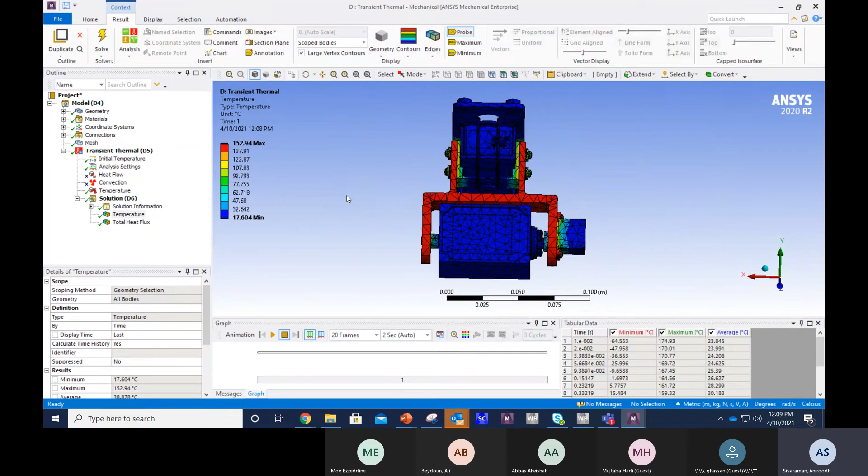And whatever condition you're in, you can specify the load. I just randomly played around to show how it can spread out, took so much time to find the way to spread it out. So this is one way of looking at it, and you can get thermal stresses and everything. If the stress is very high with thermal fatigue, like thermal cycling, it will fail. So these are some of the analyses we'll do upfront to make sure we know the failure criteria. Any questions?

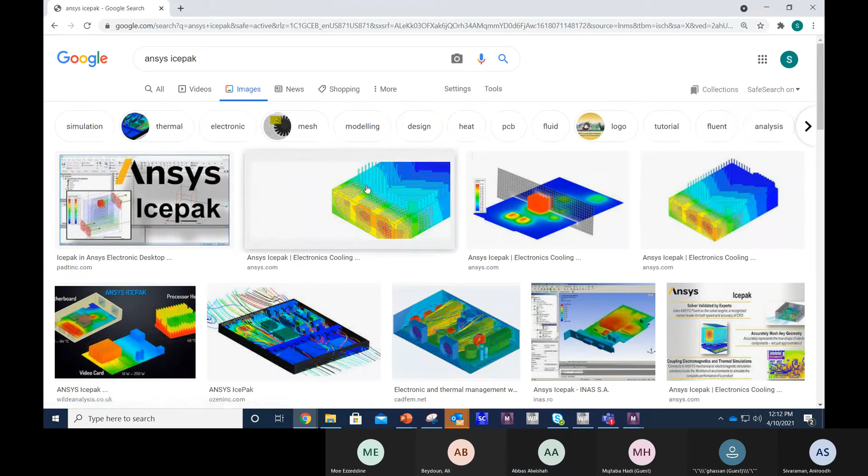Yeah, exactly. So this is a better picture, like the Ansys Icepak, that's a pretty good tool for all the electronic packaging. What you saw was a mechanical design, like all the bracket. So now what happens inside the camera? Inside the camera, you have a bunch of chips. They also produce heat, so you need to have heat sinks. So this is a heat sink. You can see all the heat sinks and everything, very simplified.

The chips would produce the heat, so we have to do a heat mapping. So everything we start to map. This is a classic heat mapping. You can see the motherboard, plus the heat sink and everything. So the idea of the heat sink, as you see, yellow and red is hot, green is cool. The chips would produce extraordinary heat, so that's why on top of the chip we put a sink, immediately wanting to dissipate the heat, because if heat builds up, it's done.

So you can see right here, it's all red. I would put a sink, move the sink and put it here, or put another sink to solve the heat crisis there. And you can see how the heat is being spread out, red, yellow, green. From 105, say it's 80 here and this is 40. That's how it splits it out. So this is a whole other topic.

Maybe I can take an example next time and show you how, inside, we can do it. So yeah, this is like strategy. You cannot have all your laptops, phones, everything getting heated up. So how good are you going to be at dissipating heat? The internal temperature of this enclosure should be much lower, say the target is less than 50 degrees Celsius. If it's above 50, 60, 70, it's okay, but the life would be reduced. So if it's less than 50, you have an amazing thermal management system, and the life of the product will be like 20 years.

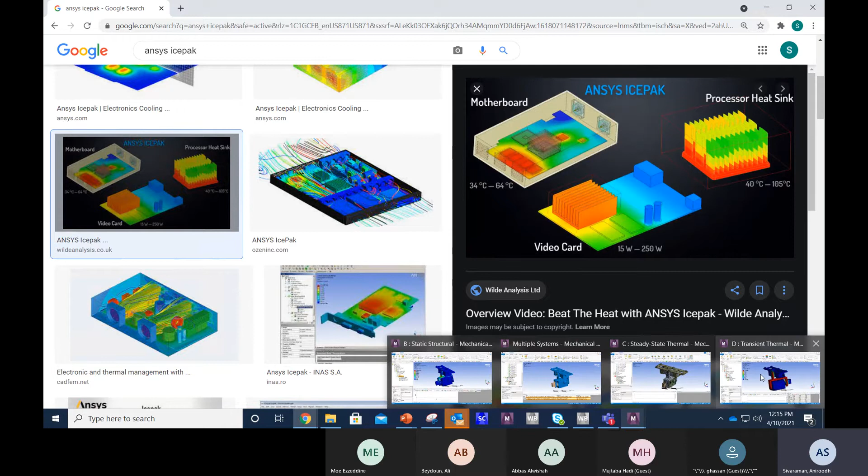Maybe sometime I can walk through it, but it's good for people watching who would like to learn about this too. Ansys is great, a lot of flexibility, and it made simulation accessible even to common people.

So that's it, what we discussed is inside this camera. Now I've gone outside the camera, but even inside there's a lot of details in it.

Yeah, great. As an electrical engineer, this is very informative and educational for me. Okay.

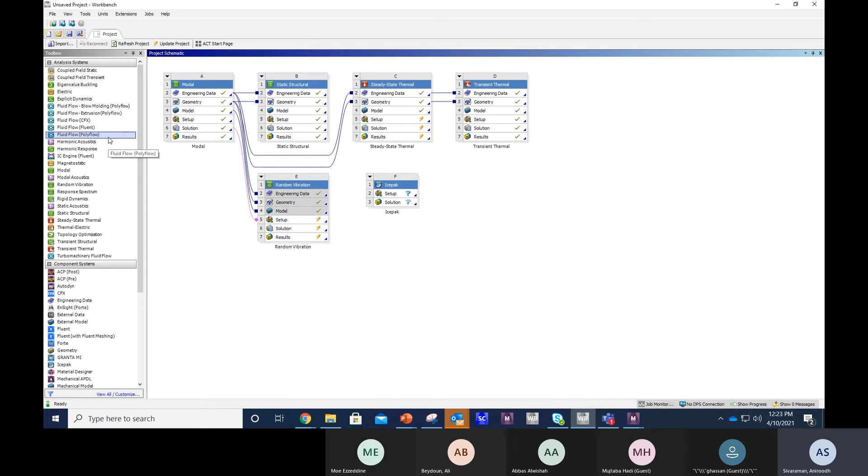Ansys has endless suites - literally like 50 PhDs gathered here. So just pull each one of them, like magnetostatic, IC engine, whichever you want to learn, fluid flow, or how blood flows inside a heart valve. Download a model, put it inside, and see. There's a lot of YouTube videos and everything. Just be fascinated by how beautiful mechanical systems are. This could not be done 20, 30 years ago - we are fortunate it's happening now. So be fascinated, and learning will be automatic, it won't be hard. Then you start loving what you do, and there won't be any stress. If not, you'll feel stressed out to do this - no, just get fascinated with the work. That's what I would say.

Yep, and we do have a network of support. I don't want to say open the network line and reach out to Anirodh 10 hours a week, but there's literally about 15 to 20 engineers from hardware to software that are going to support the team. They're not meant to solve problems, but to remove roadblocks. If you come up on something and spend a couple of hours trying to resolve it and think you've come to a dead end, okay, great - that's when you reach out, but maybe not the first 10 or 15 minutes. Please, just be bold, go around and ask questions. Don't be afraid - until you ask, how will you know? Even I don't know many things.

Many times I interact with people, I just learn something new every time. Even now, something I learned. So just keep learning and asking questions. The more I learn is with interaction and discussions, keeping an open mind, not like I've done so much of this. Every time I think I've finished it, something new keeps coming. But I just keep fascinated, not get stuck anywhere. So feel free to reach out if any roadblock or need help. Abbas, I know very well, so definitely I can help.

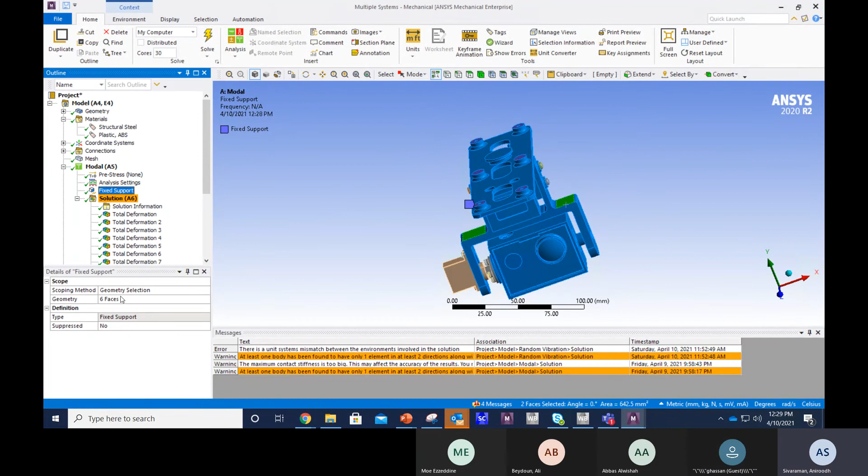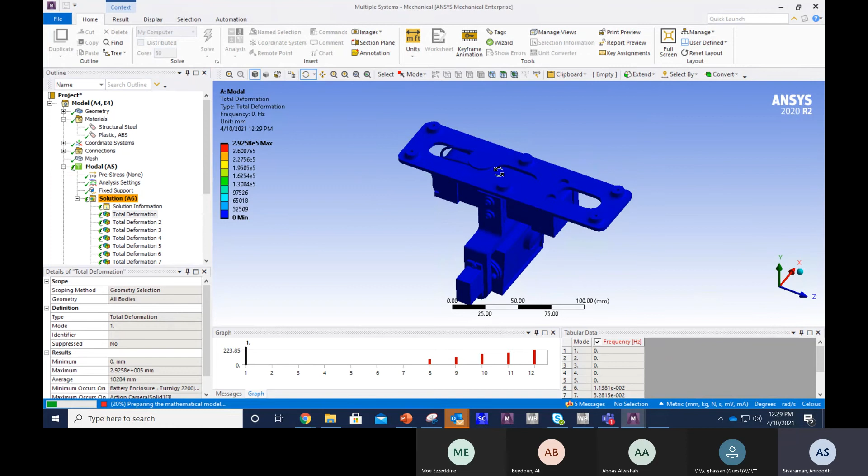One thing I would say, so this is the modal. This highly depends on how you fix the part. Right now this is the fixed support. Let's say I fix these two, fix it from here, it doesn't make sense why I do it, but if I do this, all the response would change. So as you asked, which part, is it a system or an individual? Individually they will be different, two of them individually will be completely different, but if you attach them, they'll behave differently. How you mount it determines the natural behavior, so every time you mount at different places, they're going to behave differently. That changes the stiffness of the whole system, so that's where you get a different response. That's why if it's a simple beam, you can do it, but for something as complex as this, let's say at 9 or 10, did you see it's completely different now? This is changing, and the way you're mounting is different. So it's still 12.

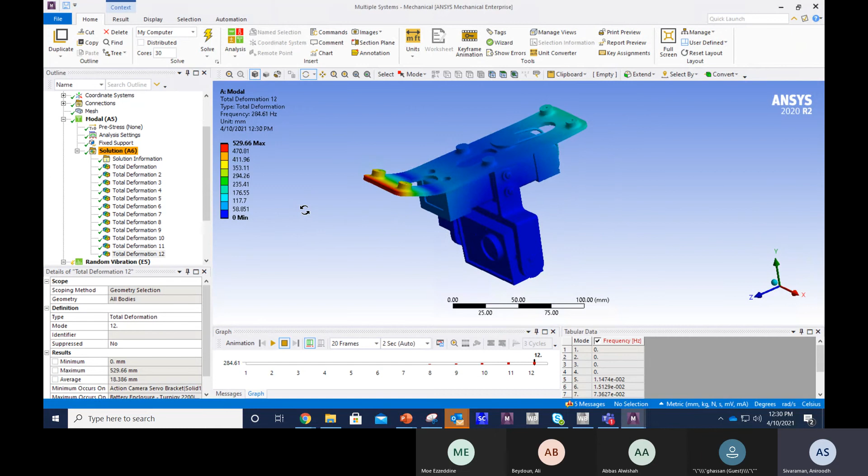So now if you see, since I pushed at the center, all the frequencies will change - 199, 223, they all are pushed around. So how you mount it is completely different. It's so non-linear, so many factors that you can't do it in Excel, it's not a simple beam like a 2D problem. It's very 3D with a lot of stuff.

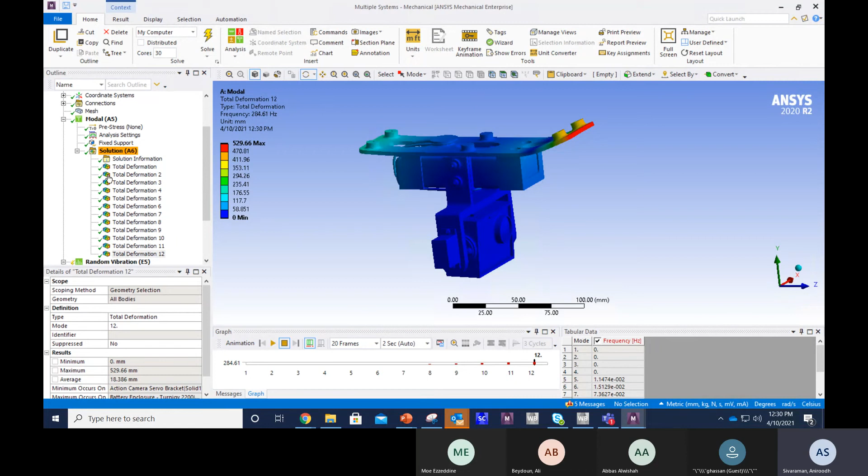So yeah, you can get very explorative, but you'll get a feeling about it, and you'll learn a lot of mechanical concepts in a reverse way, more interactively. A lot of stuff you can Google and read around, and they keep writing papers. I would say read Google Scholar more about this, and you'll get a lot of stuff. That's how I learned.

And we also have access to the Ansys Learning Hub through the sponsorship that Ansys has provided to the students and to the nonprofit organization to support the local community. So that's a big plus.

They teach both the theory behind it - the partial differential equations, matrices - and also examples. But you can start with the interactive examples, and then after some time you'll be interested in what the equations are, because endlessly you'll try to solve something, then you can go back and see. It's all recorded videos, to and fro. You can start and stop when you want.

Yeah, this is a great point you make, Anirodh. So a lot of students learn by the textbook, and they're like, okay, what's in it for me, how am I going to apply this? Now you can take a differential equation, apply it to a system, and you can see the benefit of learning that in the math class - differential equations, some calculus.

That's the reason people get pushed away from CFD or Navier-Stokes matrix equations. Even here, there's crazy equations involved behind the scenes - if I show them, people run away. So don't start there, go from the other side. See it more visually, interactively, build it with your hands.

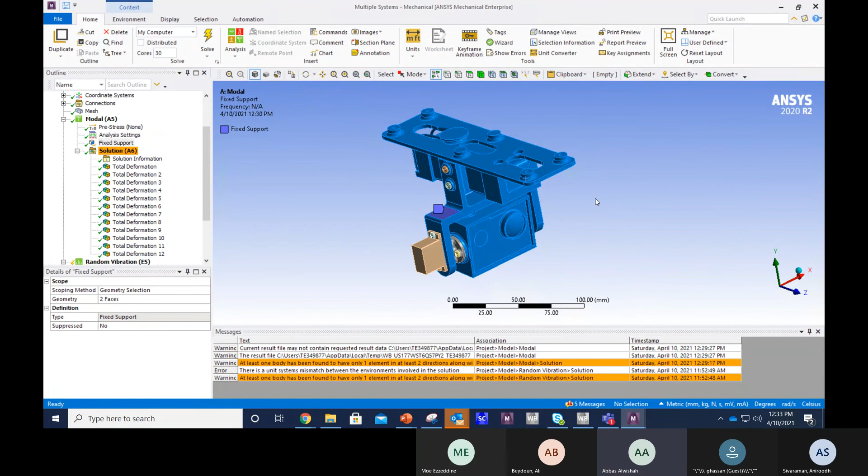But the way I see it, the other presenters will be part of the team one week at a time, where they look at the project and give some input, maybe 2 hours or so of analysis project, going through it like designing something from scratch. We're going to have a project from scratch, define it, and start designing on it, and that's when we're going to probably reach out.